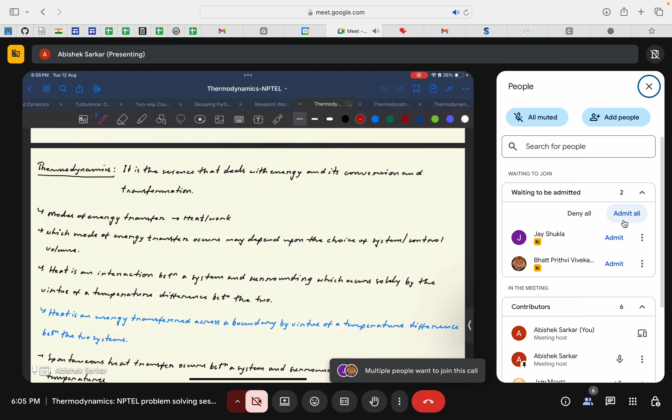So let me just reiterate. Similar to our previous week's sessions, we will try to briefly look into the concepts that were discussed by Professor Anand in the lectures. I will briefly go through them for your revision, and if any discussion is required, we will try to do that. But if there's any pertinent doubt even after discussion, I would encourage all of you to put that in the discussion forum of this course. We will look into it and respond afterwards.

And once again, I will say that all the required information or clarifications are well contained within the lectures and the suggested textbooks, so you can refer to that as well afterwards. But this session we will just try to focus more upon solving some problems, similar types of problems that are relevant to your assignments as well as your examination.

Okay, so after discussing the topics that were taken by Professor Anand in the lectures, we will directly... Sir, excuse me. Yes, please.

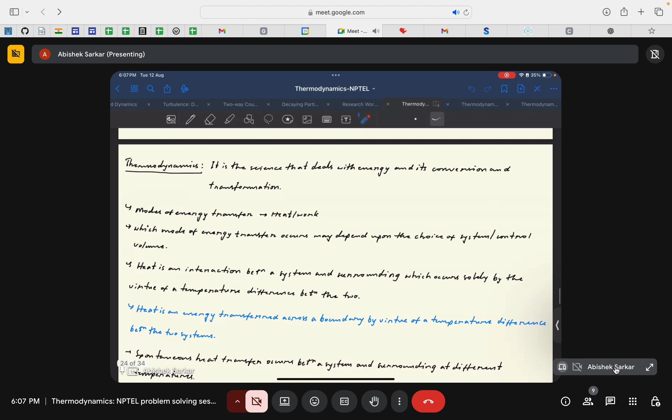Okay then. So yeah, as I was saying, I will briefly go through the topics by Professor Anand, and then we will try to solve some problems. That's the agenda for today's discussion. So with that, let's start today's discussion.

If you recall, in the beginning of this course, we mentioned that thermodynamics is a very vast subject which primarily deals with energy and its conversion and transformation. We discussed these modes of energy transfer, heat and work. By now you might have got an idea about heat and work interactions as well as internal energy. Having attended the past two lectures, you should have gotten some idea of what heat and work are. But as mentioned by Professor Anand, it is some kind of a chicken and egg thing.

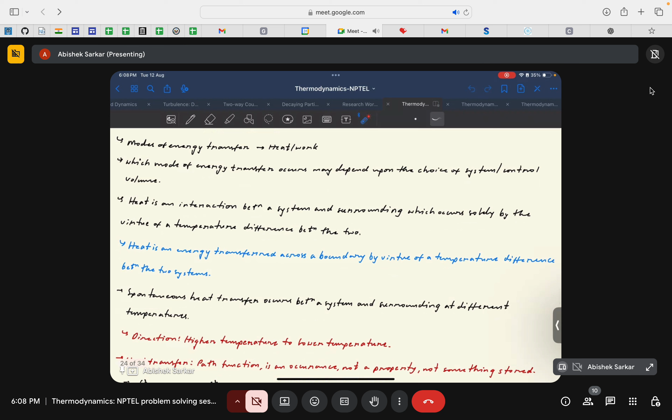So we mention heat in terms of work, then work in terms of heat, and specifically internal energy in terms of both of them. They are interconnected in a way, and this relation between heat, work, energy, and their conservation is given by the first law of thermodynamics, which is the primary topic of discussion for today's session. By now, briefly, I and Professor Anand in his lectures would have introduced you to the first law of thermodynamics, that is the law of energy conservation. This will be the primary point of discussion for today, as well as the problems depending on this topic.

And so, till now we have discussed about work interactions and internal energy, right? We have discussed internal energy in previous classes, and we have also mentioned this heat transfer, Q, but we have not dived deep into it. So before officially introducing the first law of thermodynamics, I think it is wise for us to briefly discuss heat.

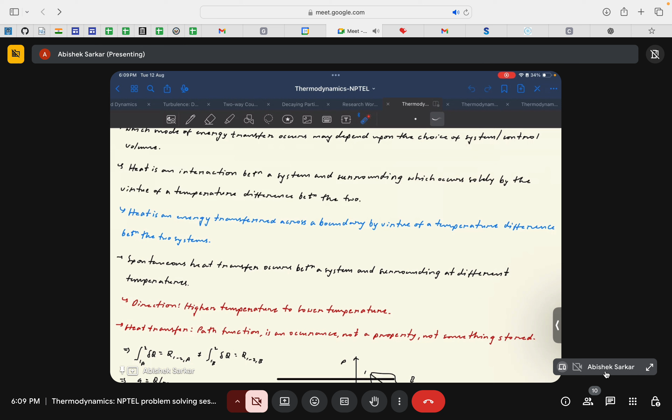Heat, I think by all means you are all quite aware of, but in terms of thermodynamics, it is similar to work. It is a boundary interaction between a system and the surrounding, which occurs solely by virtue of the temperature difference. So for heat transfer to occur, there has to be a temperature gradient between the system and the surrounding, and vice versa. That's the primary requirement for heat transfer to occur.

This spontaneous heat transfer, the heat transfer that takes place by itself, occurs between the system and the surrounding at different temperatures, and the direction of this heat transfer is always from higher temperature to lower temperature. This is observed only in spontaneous heat transfer, the heat transfer that occurs by itself.

For example, going back to the hot cup of tea example: given that your surrounding temperature is around room temperature, say 300 Kelvin or 25 degrees Celsius, and your tea is around 80 degrees Celsius, it would just make sense that the hot tea kept in a room temperature surrounding would cool down after some time, because of the heat transfer from the tea to the surrounding.

But it's not always the case. You might ask, isn't it possible that I heat the tea up even more? Yes, of course you can. It's 80 degrees Celsius initially, but if you put the tea on an induction stove, the temperature of the tea will go up. This is where heat transfer occurs by heating up the tea using an external energy source, even though the tea was interacting with a much colder surrounding.

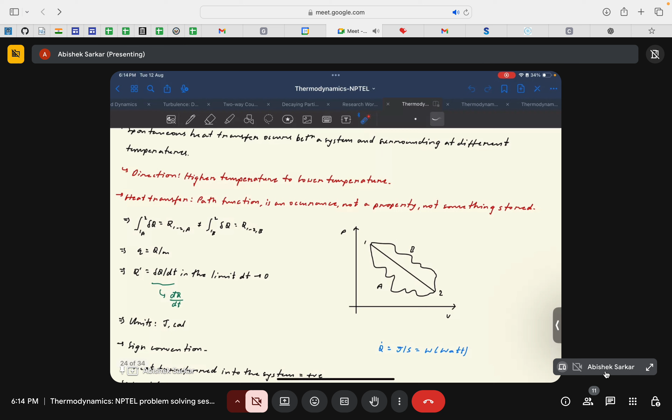Entropy is one of the most important topics in this course. Once we introduce the second law of thermodynamics, we will get more idea about the directionality of heat transfer. Right now, for the first law, we are just concerned with the balance of energy interactions, the balance between heat interaction, work interaction, and internal energy. I hope this is clear, let's proceed further.

Similar to work interaction, heat transfer or heat interaction is a path function, not a property of the system, and thus is dependent on the path followed by the system to attain or reject heat. The path followed by the system basically means the type of process incurred for the heat interaction to occur. In this diagram, the system follows two different paths, path A and path B.

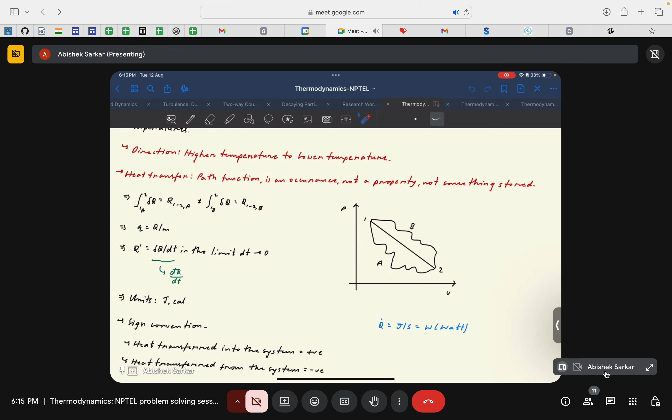Okay, for some energy interaction, for some heat transfer to occur. Since this heat transfer is a path function, heat transfer from 1 to 2 through path A will not be equal to heat transfer from 1 to 2 through path B. This will not be equal since it is a path function, but energy interaction would remain same because it is a state function.

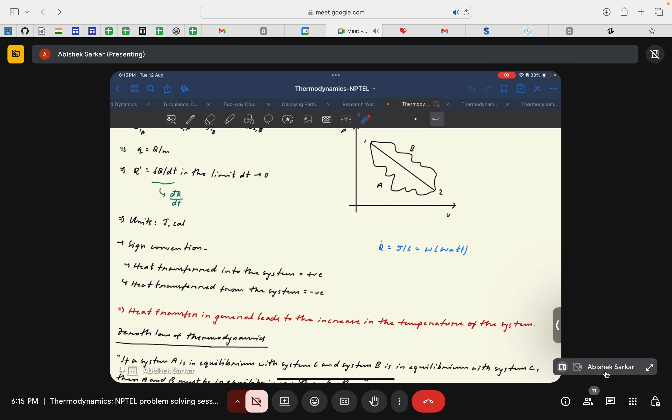We'll look into that one example. The unit of this heat interaction is same as energy and work done, that is joule or calorie. For our course we will primarily focus on joule, this is the SI unit, but calorie is also one of the units to quantify heat, work, and energy interactions.

The other important parameter is the sign convention. Previously we discussed the sign convention for work interaction. Similarly, we need to follow a standard sign convention for heat interaction as well. When heat is transferred into the system, it is taken as positive, and when heat is transferred out of the system, it is taken as negative. If you recall, in the case of work interaction, work done by the system was taken as positive, and work done on the system was taken as negative. It's a good practice to remember the sign conventions.

Of course, by practice or by regular solving of some thermodynamic problems, you will become quite familiar with it, but still it's a good practice to just remember it.

Now let's discuss the zeroth law of thermodynamics. The zeroth law of thermodynamics states that if a system A is in equilibrium with system C, and if a system B is in equilibrium with system C, then A and B must be in equilibrium with each other.

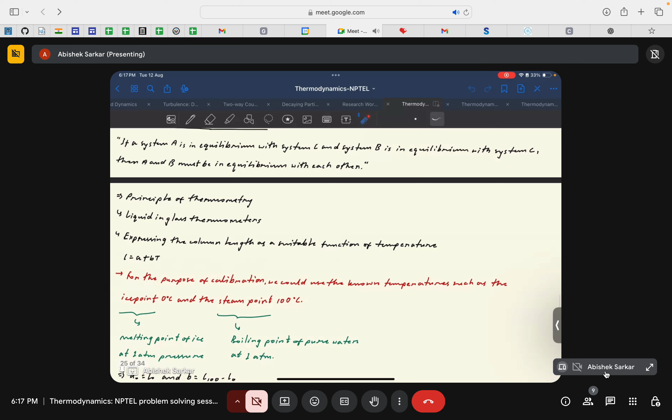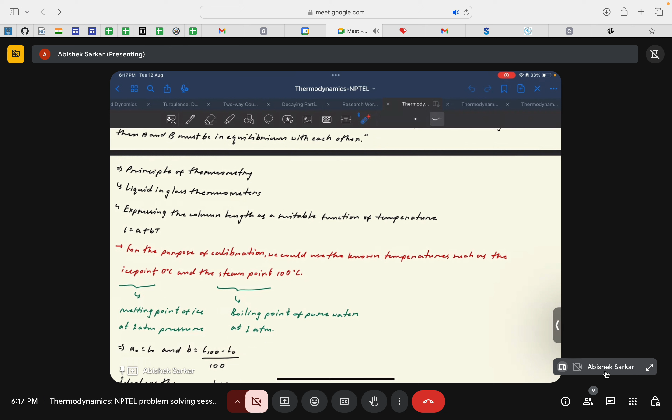This zeroth law of thermodynamics is the basis of the principle of thermometry, that is the basis of the design of thermometers that we use to measure temperatures. The details of that I won't go into - I think Professor Anand has taken ample time to discuss that, so I will just go through briefly. There are some problems, two problems I guess we have for today's discussion. I think it would be wise to look into them and emphasize on them more rather than the theory part, since it was already discussed in the class. So I will try to just go through quickly and emphasize more on the problems.

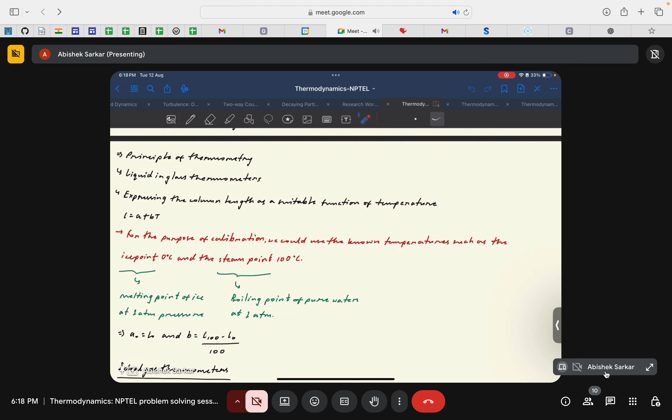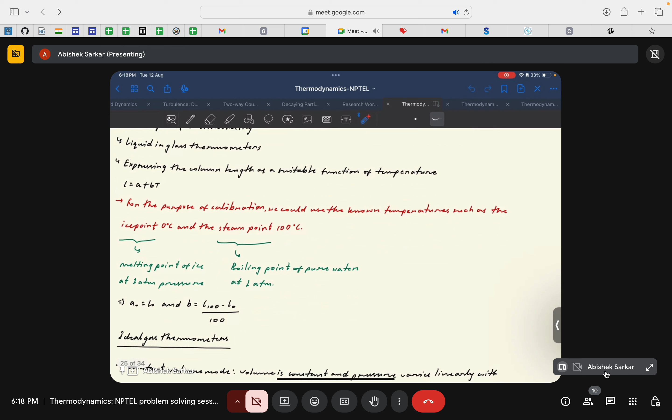There was a discussion on the liquid in glass thermometer. One example was taken, where the way of quantifying temperature was based on expressing the length, the column length, as a suitable function of temperature. We assume that the temperature and the length of the liquid in the thermometer have a linear relationship given by L equals A plus BT, where A and B have to be empirically evaluated.

And usually, as mentioned by Professor Anand, for the purpose of calibration, that is finding the value of A and B, these constants are usually found out using well-known temperature values. For example, if the liquid inside the thermometer is water, it is well known that water will freeze at a temperature of 0 degrees Celsius and boil at a temperature of 100 degrees Celsius. So if you substitute the value of these two things, then you can easily find the value of A and B, and then your thermometer will be well calibrated.

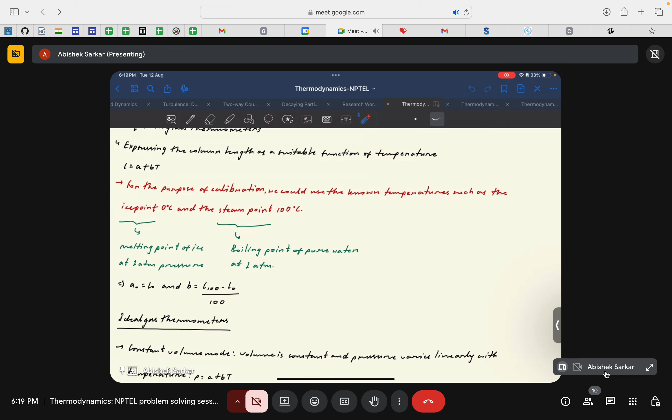Similarly, if you're using different types of liquids, if you know the boiling and melting points, then you will be able to calibrate, given that your temperature and the length of the liquid in the thermometer has a linear relationship. So that's also a suitable requirement for the types of liquid that are chosen for thermometers.

Then there were ideal gas thermometers. I think I will skip this part. Similarly, there are two modes: constant volume mode and constant pressure mode. In constant volume mode, volume remains constant and the pressure varies linearly with temperature. Inversely, in the case of constant pressure mode, pressure remains constant and volume varies linearly with temperature. So these are two things.

I will just go through it quickly. Then there are thermoelectric based devices, thermocouples, something like that, where there is a relationship obtained between the temperature and the potential difference. They assume that the electromotive force has a relationship given by A plus B T plus C T square, where A, B, C are constants, and you need to use empirical methods to find the value of these constants and then calibrate your thermometer to make it suitable for measuring temperatures. So the details of that, I think I won't go into.

There are some problems that we can look into, which will be more helpful for all of you, so I'll just try to stick to that. But if there's any doubt or specific inquiry that you want to do regarding these kinds of things, you can always put them in the discussion forum. We'll look into it and answer back. But for the sake of this session, let's try to focus on the problems.

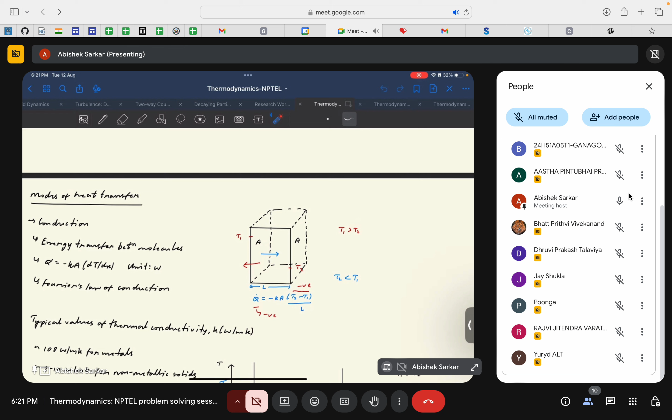As a yes or no? Yes. Yes, sir. Okay, thank you so much. Who was it? Okay, never mind, but thank you, sir. Okay, thank you so much.

So let's proceed further. Then comes the different modes of heat transfer.

Let me just say, out of curiosity or interest, that these modes of heat transfer, or heat transfer in general, is actually treated as a separate subject in the branch of mechanical engineering, because thermodynamics, or classical thermodynamics as I must say, is a fundamental or integral part of the mechanical engineering course of any undergraduate or postgraduate studies. In their course structure, thermodynamics and heat transfer are taken as two different subjects.

So heat transfer, or modes of heat transfer, are generally taken as a separate subject and are quite vast and extensive by themselves. Here we will just briefly introduce you to these three major modes of heat transfer, that are conduction, convection, and radiation. Of course, these are all mentioned in your lecture notes and were taken by Professor Anand.

But if you have not been introduced to heat transfer yet, or you are taking the heat transfer course right now, or have already taken it, just as an idea to you, I will say that this is a separate course in itself and it's quite vast and extensive, and there are ample problems that might be given from these modes of heat transfer itself.

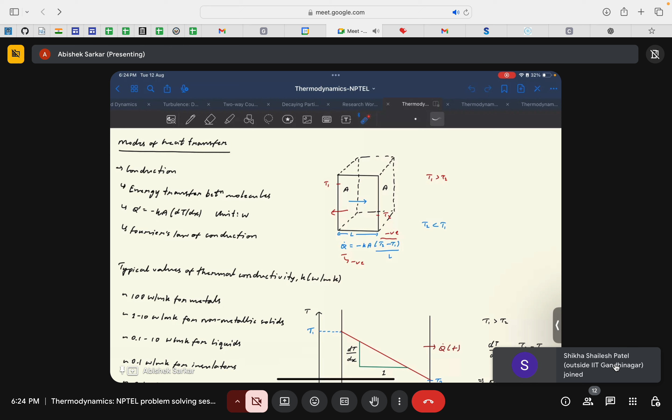But nevertheless, I will just stick to what was discussed in class. I think that would be more than enough for this course. So as mentioned by Professor Anand, there are three modes of heat transfer: conduction, convection, and radiation. We'll look into all three of them separately.

Starting with conduction, the thing that easily becomes relevant to us. In this case, the energy transfer occurs between the molecules, and the law that governs this conduction is given by Fourier's law of heat conduction, given by this relation: the rate of heat transfer is given by minus K A times dt by dx, where dt by dx is the temperature gradient between the two surfaces where the heat conduction is occurring, K is the thermal conductivity, and A is the area of contact between the two surfaces, or the surface through which the heat transfer is occurring.

Let's take this example: consider this is a wall, a cuboidal shaped wall. Then let's consider that we are looking at the rate of heat transfer across these two surfaces.

Okay, surface 1 and surface 2. Across these two surfaces, the area of conduction would be this entire area. Then you want to know the rate of heat transfer in this area, in this region. So this will be the area of concern.

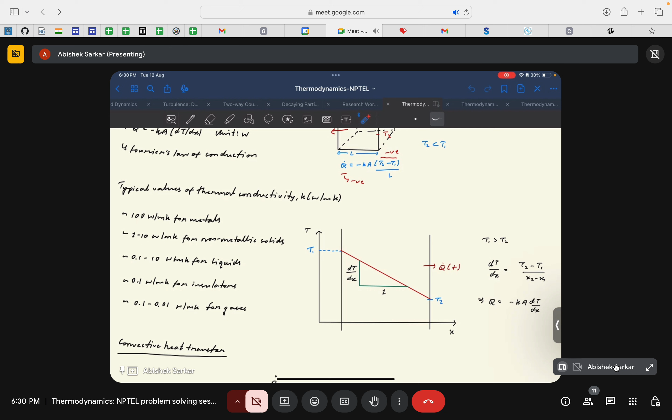I hope it was clear. And then we come into the concept of convective heat transfer. Thanks, Prithvi. So then comes the concept of convective heat transfer.

As a precursor, I will tell you that thermal conduction laws have a very analytical equation — as I mentioned, there's the Fourier law of heat conduction, a very nice analytical governing equation that governs heat conduction in objects.

But for convective heat transfer, there is a general trend that this kind of heat transfer is generally empirically quantified, because if you recall the discussion by Professor Anand in the lectures, for convective heat transfer there has to be a bulk motion of fluid, and it is only relevant in the case of fluids.

It is for gases or liquids. For convection, or convective heat transfer, to occur, there has to be a bulk motion of this fluid, either gas or liquid. This kind of heat transfer is usually quantified using empirical formulas.

Once you study heat transfer as a subject, in undergraduate or even postgraduate level, you will see that this convective mode of heat transfer is usually empirically quantified, with different coefficients mentioned to quantify this mode of heat transfer. It might seem a bit irrelevant right now, but I'm just giving you a brief introduction.

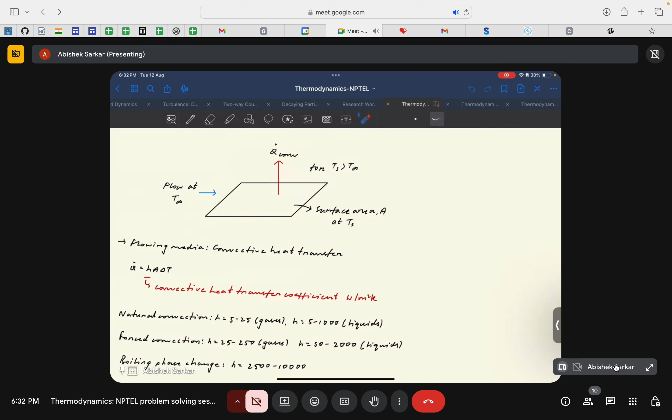Because there is a bulk flow of air across or above this plate, there will be heat transfer from this plate to this bulk motion of fluid. Because of this bulk motion, there will be a temperature gradient between the surface of the plate and the region where we want to obtain the temperature, and since there's a bulk flow of fluid, there will be a convective mode of heat transfer.

This convective mode of heat transfer is quantified by the relation: the rate of heat transfer Q dot is given by H times A times delta T, where H is the convective heat transfer coefficient, with units of watts per meter square Kelvin.

So as I was mentioning, the empirical nature of quantifying this mode of heat transfer usually comes handy when evaluating the value of this h. You will see that this value of h depends on different non-dimensional numbers such as the Nusselt number and the Prandtl number. These are something new to you, but I'm just mentioning them - they will become quite relevant to evaluate the value of h, which is then used to quantify the rate of convective heat transfer.

Just one more thing to add: if someone says there is a convective mode of heat transfer occurring, one thing to note is that if there is convection, it is sure that there has to be conduction as well. Let me give you an example.

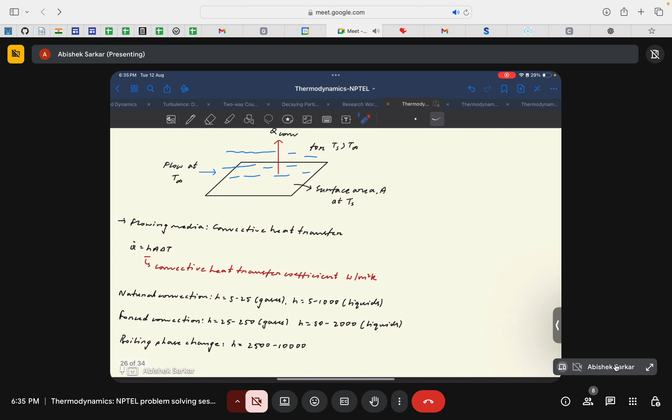Again, there are two different types of convection: natural convection and forced convection. I think this was discussed thoroughly before, but I'll just say that natural convection occurs because of a density gradient - the flow of fluid above the surface may occur because of density gradient. For example, it is kept stationary and continuously heated.

Because of heat, the layer of fluid near the surface of the plate will get heated up and become of lesser density. Since it is of lower density, this low density fluid will try to go up and the higher density fluid will try to come down. When the higher density fluid comes down, it will again get heated up and become of lower density than the upper layer, and again try to go up.

This type of motion will continue to occur, which is popularly known as convection loops. As you can see, there is no external agency being used to generate the bulk flow of the fluid. This motion of fluid is only occurring because of the density gradient. These kinds of flows are known as natural convection.

The value of H generally for gases in the case of natural convection is from 5 to 25 watt per meter square Kelvin. Similarly, in the case of liquids it is higher, around 5 to 1000 watt per meter square Kelvin. But in the case of forced convection, rather than the density gradient generating the bulk flow, for example, I am using an external fan.

I am using a fan to flow the liquid or force the liquid to flow through the plate. In that case, I am using an external agency to force the flow of liquid over the plate. So this is known as forced convection.

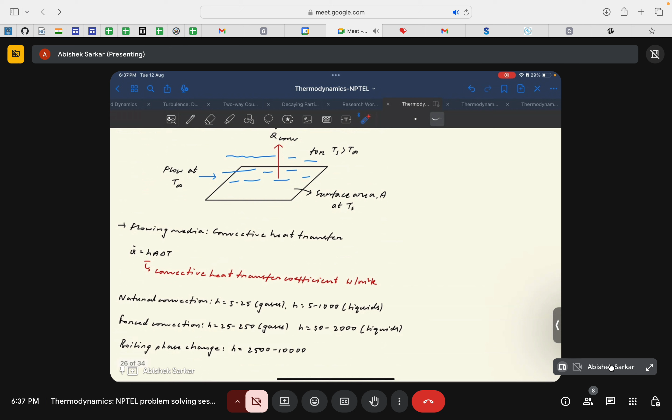In this case, even if your geometry is the same and the temperature difference is the same, the rate of heat transfer will increase because of the higher value of H in forced convection. So for the same geometry and temperature difference, the value of H or the convective heat transfer coefficient is higher for forced convection compared to natural convection.

For gases it now varies from 25 to 250, and for liquids it varies from 50 to 2000. So if you are solving a problem based on forced convection and getting a value of H for liquids around say 5 to 25, then you should think it might not be correct, because for liquids in forced convection cases, the value of H usually varies from 50 to 2000, usually around at least 1000 or greater.

It's just a good way: if you know the range of these values, you will know that your answer might be faulty, if you know the common values of H for different types of flows. Then for boiling phase change, the value of H is usually around 2500 to 10,000. I will look into it once it becomes more relevant.

Now for radiation, this is again transmission of energy through electromagnetic waves in space. The formula that governs the rate of heat transfer through radiation is given by the Stefan-Boltzmann law: q dot equals epsilon times sigma times A times Ts to the power 4, where Ts is the surface temperature of your object which is emitting heat. Sigma is the Stefan-Boltzmann constant given by 5.67 into 10 to the minus 8 watt per meter square Kelvin to the power 4, and epsilon is the emissivity of the surface compared to a black body. This value of emissivity is given for different kinds of surfaces.

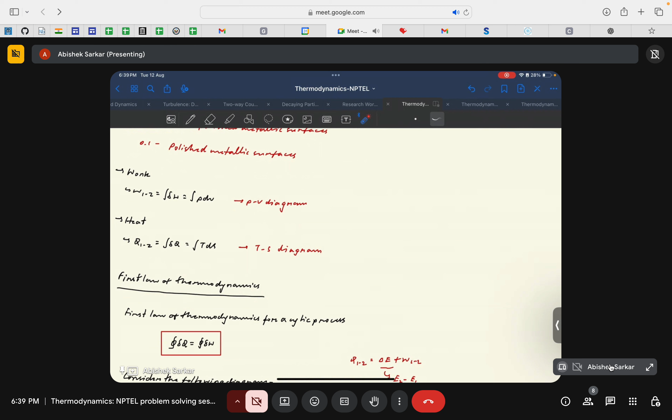So again, a brief introduction: in the case of work transfer, we used a PV plot to get a quantitative idea of how work transfer is observed or quantified, and we saw that the area under the P-dV curve gives us the value of work transfer.

Similar to that, in the case of heat transfer, there is a different plot: the temperature-entropy plot, and the area under this T-dS plot or temperature entropy plot gives us the net value of heat transfer. This will become quite relevant when we discuss different thermodynamic cycles, but it's still a good way to introduce it to you.

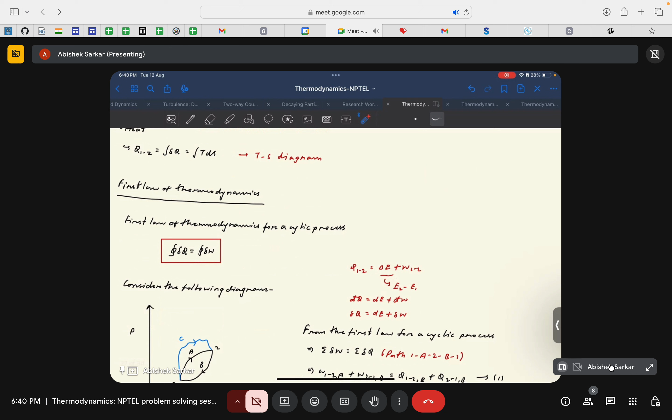Now let's formally introduce the first law of thermodynamics. I briefly mentioned in the last class through a numerical problem that if there was a thermodynamic cycle occurring, we found that the summation of the total heat interactions in the system and the summation of total work interaction of the system are equal in the case of a cyclic process.

Okay, so in general, the first law of thermodynamics is given by this law. For example, if a system is going from state 1 to state 2, then the total heat transfer is equal to the change in internal energy plus the total work transfer. The sign of this work transfer depends on whether the work is done on the system or by the system. Similarly, the sign convention for heat interaction depends on whether heat is transferred into the system or rejected by the system.

So this is the general form of the first law of thermodynamics. But things become interesting when the thermodynamic process occurs in the form of a cycle. In the case of a thermodynamic cycle, the total heat interaction would be equal to the total work interaction, given by this relation.

So now there is an elegant way to show that our internal energy, or the energy of the system, is indeed a point function. Let us look into it.

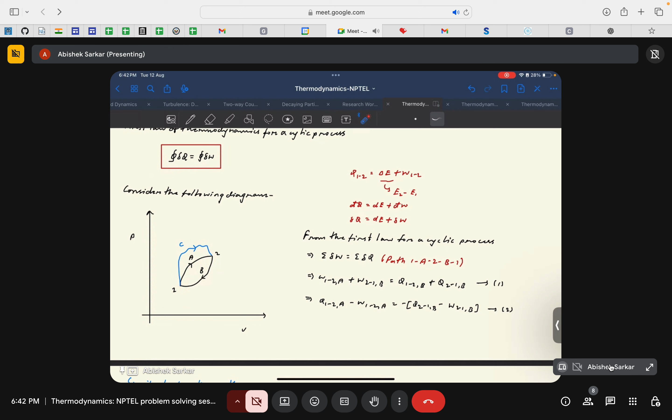Consider a thermodynamic cycle occurring from point 1 to point 2. It might happen that we follow path A to go from point 1 to point 2, then come back to point 1 following part B. Or we can go from point 1 to point 2 through part C and then come back to point 1 through part B. So you can see that the way we go to point 2 varies depending on the part followed, either A or C, but the way we come back to point 1 is through B only.

For example, these different parts would imply different types of processes followed to obtain the change of state. It may happen that part A is an isothermal heat transfer, path C might be a polytropic process with an index value of say 1.3, but part B is an isobaric process where the heat transfer occurs at constant pressure. So there might be different ways through which the change in state has been obtained.

Now from the first law of thermodynamics, since this is occurring in a cycle, we get that the summation of net work interaction is equal to the summation of net heat interaction. Say I'm considering the first path, that is 1-A-2-B-1. Then work done from 1 to 2 through A, plus work done from 2 to 1 through B, would be equal to the net heat transfer from 1 to 2 through A and the net heat transfer from 2 to 1 through B.

Net work done from 1 to 2 through A plus net heat interaction from 1 to 2 through A, then net heat interaction from 2 to 1 through B. If you rearrange this, taking this term here and this term here, you will get that Q(1 to 2, A) minus W(1 to 2, A) is equal to minus of Q(2 to 1, B) minus W(2 to 1, B). So that is equation 2.

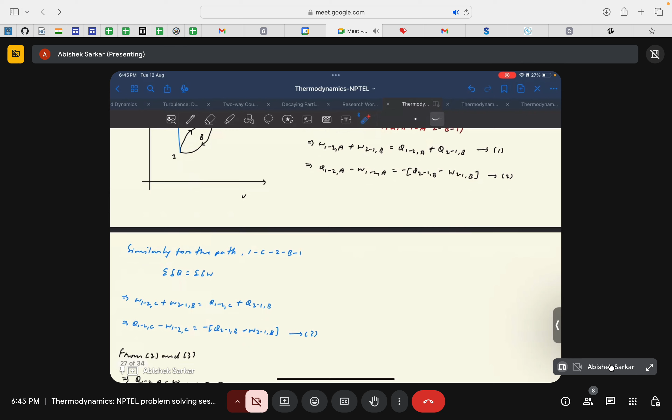So it implies that Q1 to 2A minus W1 to 2A is equal to Q1 to 2C minus W1 to 2C. So even if your net heat transfer or net work transfer is dependent on path, this entity, heat minus work, is independent of path. You can see that Q1 to 2A minus W1 to 2A is equal to Q1 to 2 minus W1 to 2C. This difference between heat and work is a path independent property.

So if it is a path independent entity, then this becomes a property of the system because it is path independent. And this difference, from the first law of thermodynamics, is the energy of the system. So this proof shows us that the energy of the system is independent of path and is thus a property of the system, or a point function.

This is a point function, or a state function. I hope this discussion was clear.

So again, there is a following brief discussion on different kinds of energy of the system. Professor Anand showed that the energy of the system might be comprised of, or the total... just one second, just one second.

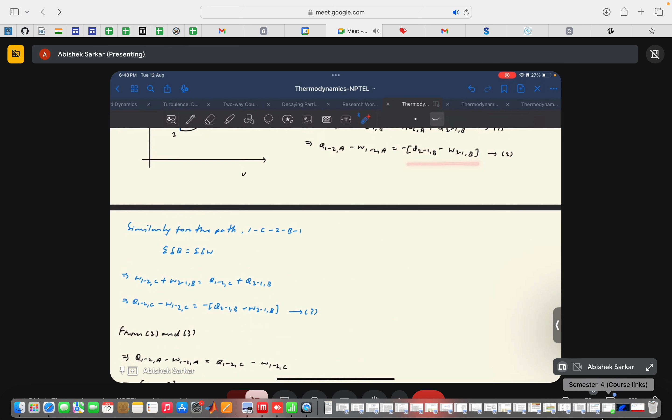From 2 and 3, let me just write it again. From 2 and 3, you can see that the right hand side of the equation is exactly the same. That's one thing to note. So if that's the case, it will imply that the left hand side are equal to each other.

So Q1 to 2A minus W1 to 2A should be equal to Q1 to 2C minus W1 to 2C. Is it fine? From equation 2 and 3, if the right hand side is exactly the same, then the left hand side should be equal. So I can say that Q1 to 2 minus W1 to 2 through path A should be equal to Q1 to 2 minus W1 to 2 through path C. So I'm saying that even if...

Q1 to 2A is not equal to Q1 to 2C, and W1 to 2A is not equal to W1 to 2C, because these are path functions, but their difference, the difference between Q1 to 2A and W1 to 2A, is equal to Q1 to 2C minus W1 to 2C. Even if these are dependent on path, their difference through different paths is the same. So that's what I wanted to show, as demonstrated by Professor Anand in the steps. This difference is same for any path, or independent of path.

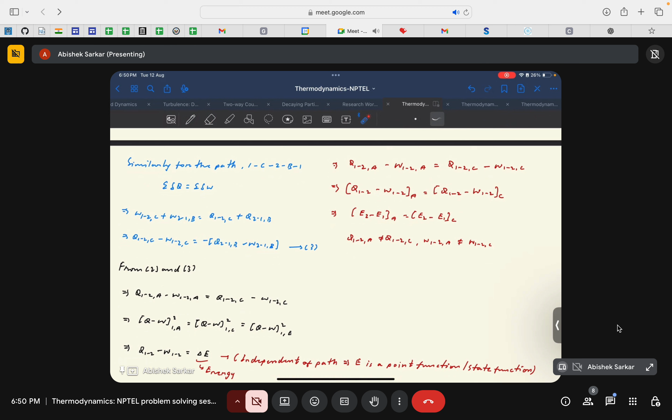So from the first law it will basically imply E2 minus E1 for path A is equal to E2 minus E1 for path C, from this relation. So it implies that this change in energy is independent of the path, even if individually Q and W are path functions, but the difference is a point function or a state function. So is it clear?

Okay, thanks Jay. Astha, is it clear? Yeah, thank you Astha.

Okay, so as I was saying, following that, Professor Anand has discussed different types of energy of the system that comprise the total energy of the system, that is E. E here is actually the total energy of the system, which can be majorly comprised of the kinetic energy, potential energy, and the internal energy. Sir showed different ways through which you can quantify your kinetic energy and potential energy.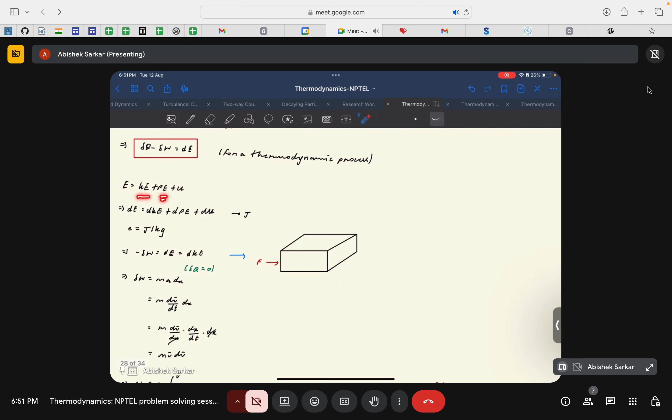So kinetic energy can be quantified as mv square by 2. You can go through the steps in the lectures, I will not go through it right now. Potential energy is quantified by mgh, and your internal energy is, again, for ideal gases usually quantified by cv delta t or cp delta t, depending upon how the process is achieved. But we will look into it once we get to some relevant examples.

So for example, in this case, if there is a piston cylinder type of system where you are supplying, and this is your control volume, with variable size, a deformable control volume, one way to say it. Now if you are saying that you are applying a heat of 100 joules into the system, which is resulting in this gas to expand, and because of the expansion of the gas within the cylinder, it is able to push the system outwards to obtain a certain amount of displacement, which is resulting in a net work done against the atmospheric pressure to be equal to 50 joules.

The total internal energy stored within the system would be 50 joules from the first law of thermodynamics. The net heat interaction is positive because heat is applied into the system, so it is 100 joules, and work is done by the system. Q1 to 2 equals delta E plus W1 to 2. Heat is applied into the system, so it is positive. Work is done by the system, since it's expanding against atmospheric pressure, so it is positive 50. So delta E becomes 100 minus 50, equal to 50 joules.

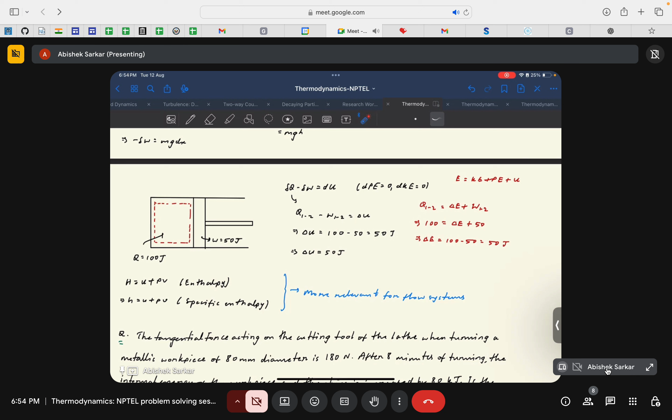But how is it delta U? We know that E is Ke plus Pe plus U. In this particular example, there is no major significant change in the kinetic energy or the potential energy, so the type of energy that has the major contribution to the total energy of the system is the internal energy. With that approximation or justification, we can write that delta E should be equal to delta U.

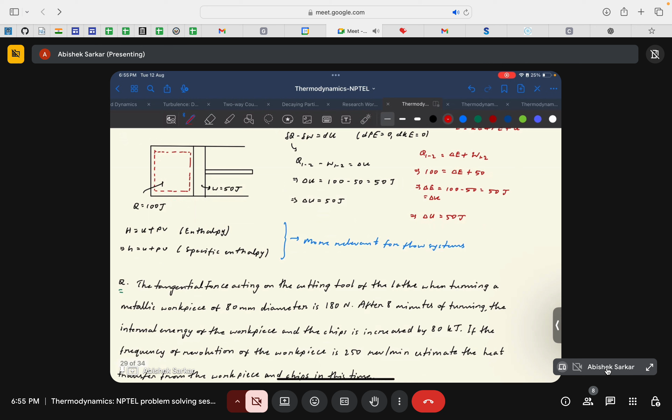Delta U should be equal to 50 joules. Depending on the type of system, the contribution to the total energy would vary, but from a thermodynamics perspective, the types of problems we will deal with would majorly emphasize more on the internal energy of the system, that is delta U. That's what I wanted to mention.

Then there is the introduction of enthalpy, which is thermodynamically defined as the sum of internal energy U plus the product of pressure and volume. Or if you divide it by mass, it becomes the specific enthalpy: h equals small u plus pressure times specific volume. So it's just a thermodynamically defined entity, or property of the system, and this property becomes more relevant in the case of flow systems. We will see some examples with flow through the system, where you'll be able to appreciate the introduction of enthalpy.

So let us look into some problems. These problems I will just go through briefly, since they were already taken by Professor Anand in the lectures. There are, I think, 2 problems, and I have time to go through both. Then we can directly start the problem solving part.

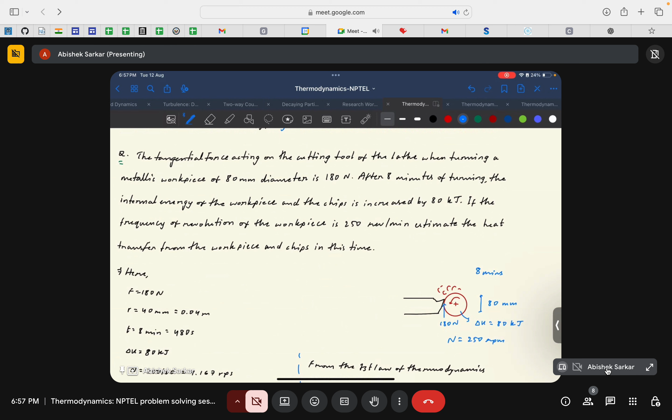Let's go through this example very quickly. This was already covered in the lectures, but I'll go through it quickly so you can brush up your solving skills, and then we can go to the real thing.

The tangential force acting on a cutting tool of a lathe when turning a metallic workpiece of 80 mm diameter is 180 Newton. So the cutting tool is exerting a force of 180 Newton on the workpiece. After 8 minutes of turning, the internal energy of the workpiece and the chips has increased by 80 kilojoules.

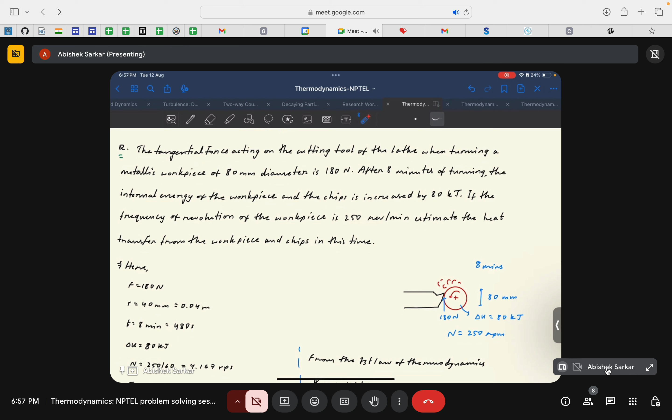If the frequency of revolution of the workpiece is 250 revolutions per minute, estimate the heat transfer from the workpiece and chips in this time. If you look into it, all the specifications are already given: the net change in internal energy has increased by 80 kilojoules, and the work is done on the system.

Work is done on the workpiece through the tool, and since it is having a rotational motion, this kind of work done can be quantified through your net moment applied on the tool. So the net moment would be force times the perpendicular distance.

So T would be F times R, that is F, the tangential force was 180 Newton as mentioned in the question, and the radius is 80 divided by 2, or 40 millimeter. So the net moment or torque in this case is 7.2 Newton meter.

Now the revolution per minute is 250, so the revolution per second you have to find to quantify the net work done. So N will be 250 divided by 60, or 4.167 rounds per second. We know that the net work interaction is given by torque times the angular displacement.

The angular displacement is given by 2 pi N t, where N is in rounds per second, and t is the total time. So this will become 2 times pi times 4.167 times 7.2, that is the net torque, and t is 480 seconds, 8 minutes. If you do that, you will get work done as 90.4 kilojoules.

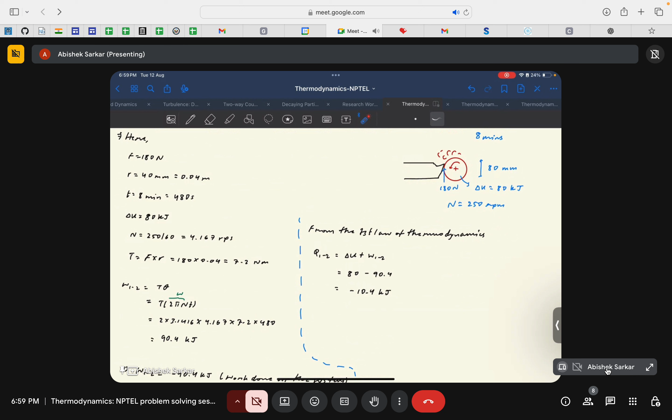And it is minus because work is done on the system, where your system is your workpiece. Work is done on the piece through your cutting tool. So now by first law of thermodynamics, we have that Q1 to 2 is delta U plus W1 to 2.

Then delta U is 80, has increased. They mentioned that internal energy has increased by 80 kilojoules. So work is done on the system by this cutting tool, so it is minus 90.4.

So the net heat transfer is minus 10.4 kilojoules. So heat is being dissipated out of the system. That's what we get from this thermodynamic law. Again, it's a very simplified portrayal of the real problem, but it's just a way to introduce you how to apply the first law of thermodynamics.

Okay, thanks Jitendra. Now let's directly dive into the problem solving part. I hope my screen is visible.

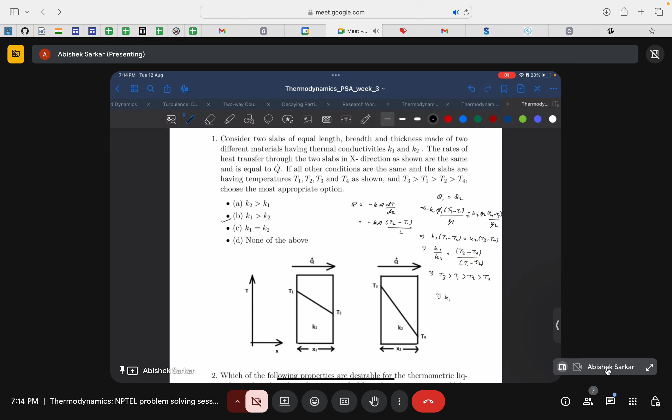Okay, just simple rearrangement. So now, because T3 has the highest value, which is greater than T1, which is greater than T2, and which is greater than T4 - since T3 has the highest value and T4 is the least value, and T1 and T2 are intermediate, it simply implies that this difference of T3 and T4 has to be greater than the difference between T1 and T2 from this relation. It's easily understood. So this would imply that K1, the numerator, is greater than the denominator, so K1 should be greater than K2. Okay, so it was quite simple.

Let's see whether, okay, this question is again interesting, it's more theoretical, in a more theoretical sense. So the question is which of the following properties are desirable for thermometric liquids in a liquid-in-glass thermometer?

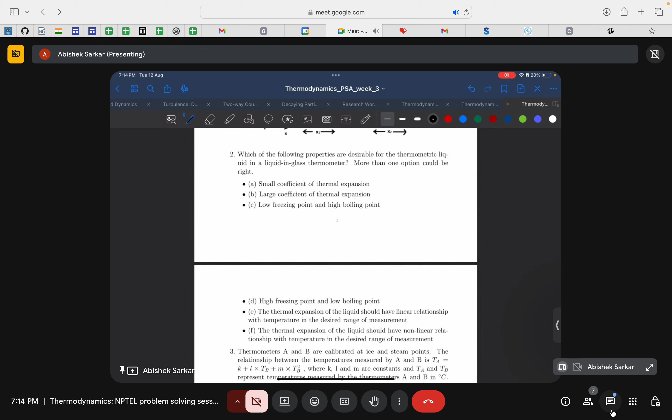And more than one option could be correct. Okay, so I can give 2 minutes. You can put in your answers in the chat. Let us just look into it, there can be more than one option that might be correct. Give your answers, let's look into them, discuss them, and then I think we'll proceed. Okay, 2 minutes, 7:15 to 7:17, you can just discuss your answers, tell your answers, and we'll discuss them.

Okay, Aastha says B, C, and E, where B is large coefficient of thermal expansion. Jay also says B, C, and E. C is low freezing point, high boiling point, and E is thermal expansion - the liquid should have a linear relationship with temperature in the desired range of measurement.

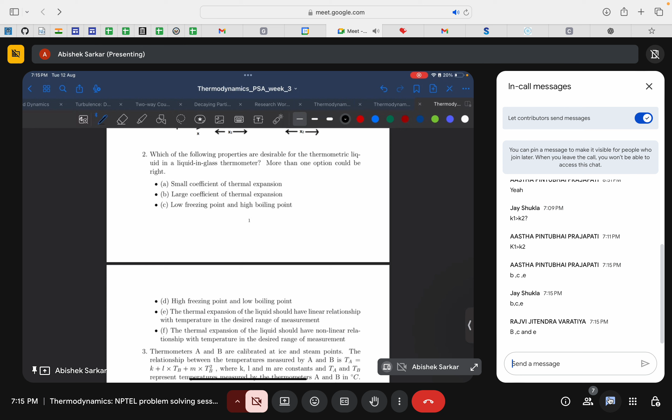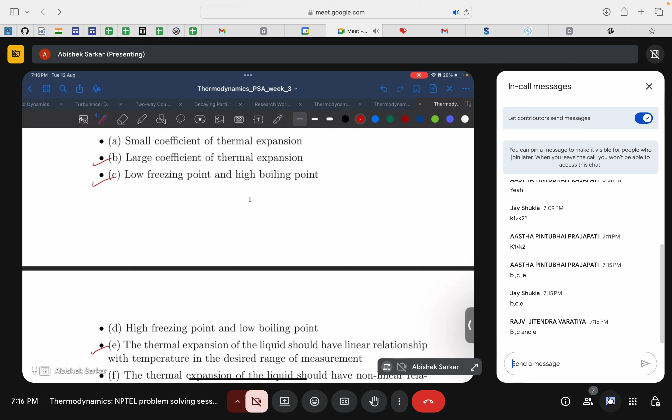Okay, so as it seems that all of you are telling the right answer, since 3 of you have mentioned it, it is correct. The required properties are that you should have a large coefficient of thermal expansion, low freezing point and high boiling point, and the thermal expansion of the liquid should have a linear relationship between the temperature and the desired range of measurement. Okay, it's quite understandable from the statement itself, but let us just go through them once so that it becomes a bit more clear.

Okay, so first is the large coefficient of thermal expansion. The thing is, for example, if you're using a thermometer where the fluid expansion is quite low between two different temperature values, then it will become quite difficult to read between the scales.

For example, if the liquid in the thermometer rises up to a value of only 1 millimeter for a temperature change of 10 degrees Celsius, then it becomes quite difficult to measure temperature values which have variations of 5 degrees Celsius. It will vary to 0.05 to 0.5 millimeter, which is almost imperceivable by a human eye.

So that's why it's desired that it should have a large value of thermal expansion coefficient, so that even for small temperature changes, the liquid inside the thermometer should vary a certain value, so that the reading between temperature values becomes easier. Second is low freezing point and high boiling point.

You can see that the requirement is that the fluid inside the thermometer should be in the liquid state. It becomes quite desirable that, since if it has a very low freezing point and a very high boiling point, the range of temperature in which the thermometer would work becomes larger.

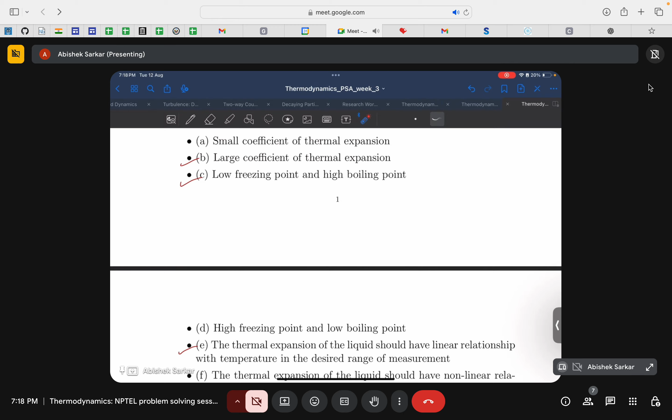That's why it's beneficial if the value of the freezing point is low and the value of the boiling point is high for this kind of liquids which are used inside the thermometer.

Finally, the thermal expansion of liquid should have a linear relationship with temperature in the desired range of measurement. This is something we have already discussed while talking about thermometers and the zeroth law of thermodynamics, that it is ideal if there is a linear relationship between the temperature variation and the rise of the liquid column inside the thermometers.

If the relationship becomes quadratic or cubic, this becomes quite difficult to calibrate. Finding the value of your constants in the relations becomes quite difficult, and it becomes difficult to observe as well.

For example, if in the lower temperature spectrum the liquid varies linearly, say for 10 degrees Celsius it shows 1 millimeter deflection, and for 20 degrees Celsius it shows 2 millimeter deflection, it's a linear relationship.

But in the higher end of the spectrum, say around 80 or 100 degrees Celsius, the relationship becomes different. For example, for a 10 degree difference it shows 1 millimeter deflection, but for a 20 degree difference it shows 40 millimeter deflection. So the relation becomes non-linear, and that's not desirable.

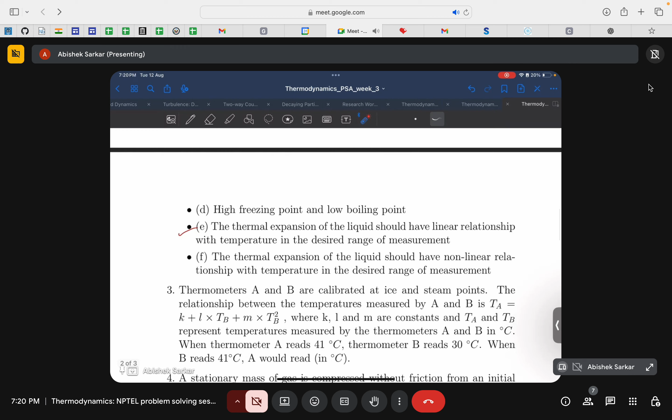That's why it's desirable that if the relation is linear throughout the range of operation, first, the calibration becomes easier, and second, the measurement of temperature becomes convenient. So that's the two things.

Now let's go to question number 3. I hope it was understandable. Let us go to question number 3.

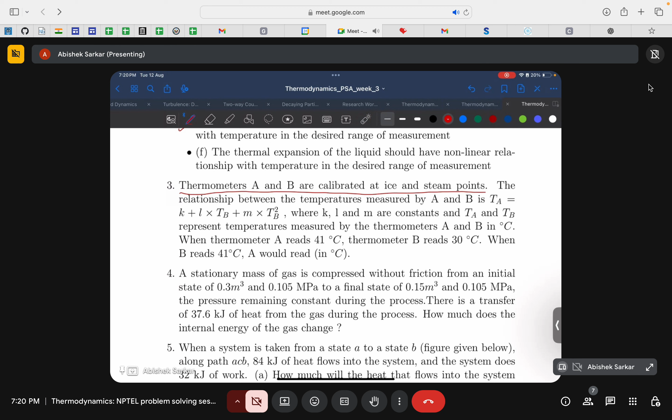Thermometers A and B are calibrated at the ice and steam points. Again these are very crucial statements, that they are calibrated. The relationship between the temperature measured by A and B is given by - oh sorry, I think we already did this example, so we can skip that part.

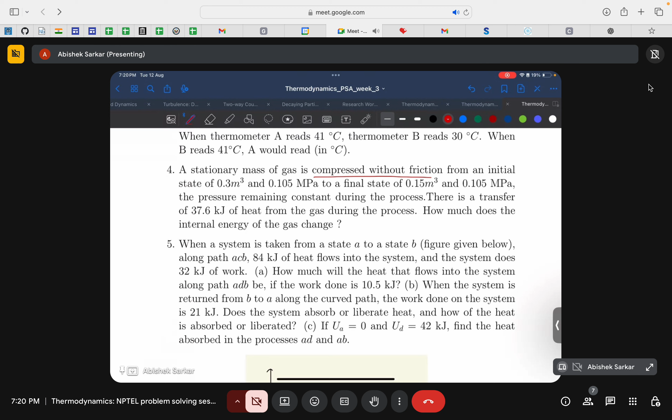Let us look into this question. A stationary mass of gas is compressed without friction from an initial state of 0.3 meter cube and 0.105 megapascal to a final state of 0.15 meter cube and 0.105 megapascal. So pressure, you can see, is remaining constant during the process - that's one thing to observe. There is a heat transfer of 37.6 kilojoule from the gas during the process. How much does the internal energy of the gas change?

I think again it's a very simple implementation of the first law of thermodynamics. You need to find the work done from these relations, these values. The net heat interaction is already given. Find the net change in the internal energy, or delta U, I must say.

So I will give you 4 minutes again to try to solve this question, and then we can proceed further.

Very simple, not that difficult. Simply just find the work done, the constant pressure work done - it's an isobaric process. Substitute these values in the first law of thermodynamics. Now then tell me the net change in internal energy.

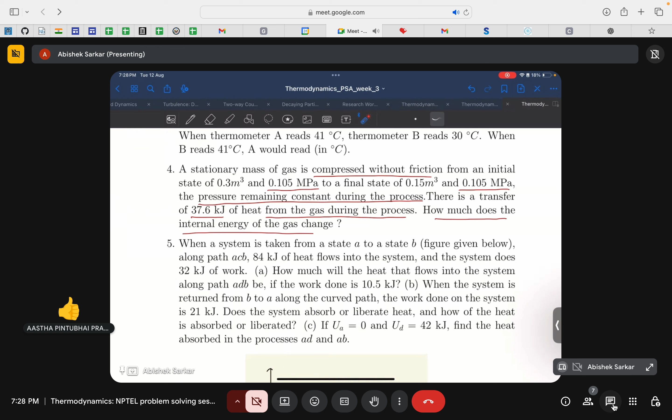So is it clear, Astha and Jay? Okay then, so let us look into the next question.

This question is a bit lengthy, so I'll keep it for the last. Let us look into this question first. I will give you this one as well for your exercise, to see whether you understood it properly or not.

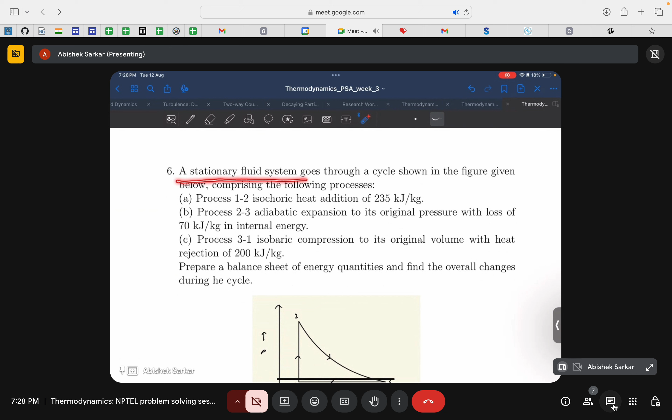A stationary fluid system goes through a cycle, as shown in the figure given below, comprising the following processes. Process 1 to 2 is an isochoric heat addition of 235 kilojoule per kg. Also look into the units of heat, it's saying heat energy per unit mass, so 235 kilojoule per kg.

Process 2 to 3 is an adiabatic expansion to its original pressure, with a loss of 70 kilojoule per kg of internal energy. So the net change in internal energy from process 2 to 3 is minus 70 — internal energy reduces, so minus 70 kilojoule per kg.

For process 3 to 1, it is an isobaric compression back to its original volume, with heat rejection again of 200 kilojoule per kg. So with this information, prepare a balance sheet.

This one you can just leave for the last. But right now, what you should do is find for me the total heat interactions. The question would be: find the summation of Q and the summation of W for the cycle.

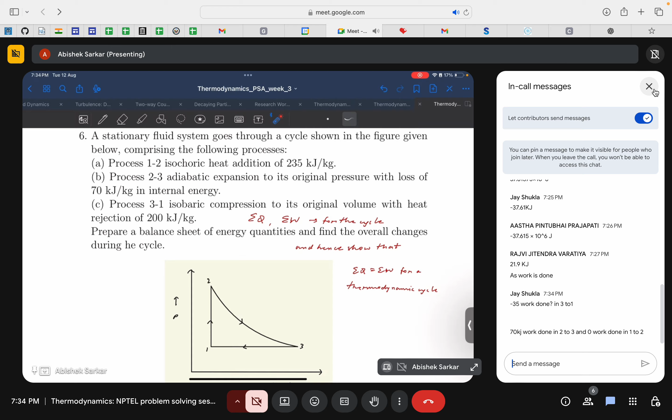Okay, so 3 to 1. Okay, let me just check. Okay, yeah, that's correct, Jay. That's correct. Yes, yes, it's correct.

Okay, so Jay has already given his answer. So others, Astha and Jitendra, can also contribute. Say 2 more minutes.

Yes, yes, Jitendra, that's correct. Yes, yes, Astha, that's also correct.

2 to 3, no, no, no, no, no. 2 to 3 would have a work done because there is an expansion going on. 1 to 2 does not have a work done, because it's an isochoric process. Constant volume process would not have any PdV work done. So from 1 to 2, work done is 0. 2 to 3, there is a work interaction.

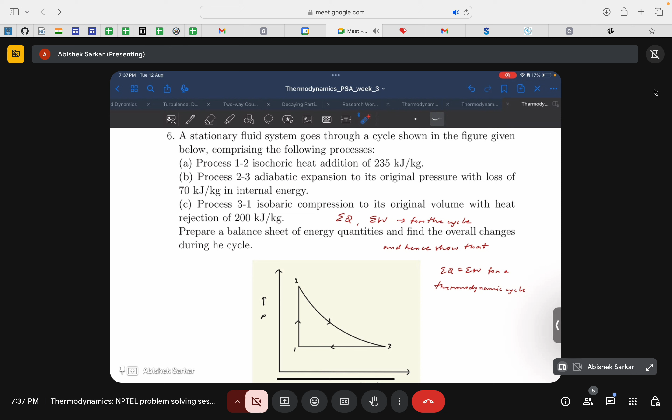Okay, time's up it seems. So thanks again to all of you for trying and answering. Let's look into the solution. It's quite simple, but again it's important to know. So this is the diagram.

Heat interaction from 1 to 2 is given as 235 kilojoule per kg. Work done from 1 to 2 is 0 because it's an isochoric process, constant volume process. So from the first law of thermodynamics, the net change in internal energy from process 1 to 2 is 235 kilojoule per kg, because work is 0 and Q from 1 to 2 is 235, so net change in internal energy is 235 kilojoule per kg.

Intuitively also you can understand that if heat is added to the system, the vibrations of the molecules of the system will increase, which will in turn increase the internal energy of the system, given that it's doing no work, so energy will be stored within the system.

Second is an adiabatic expansion. Since it's an adiabatic process, the net heat interaction is equal to 0, Q will be equal to 0. So from the first law we'll have that negative of work done from 2 to 3 is equal to U3 minus U2.

Since the change in internal energy is given in the question as decreased by 70 kilojoule, we will have that minus work done of 2 to 3 is equal to negative of 70 kilojoule. So cutting all negative sign from both sides, we get work done from 2 to 3 as 70 kilojoule per kg.

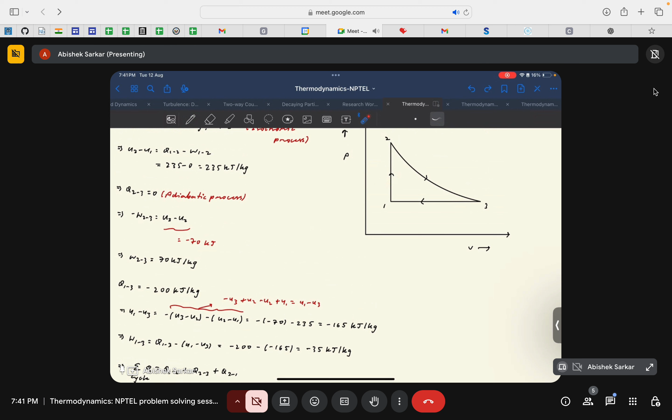Even so, let's check: the net heat interaction is heat added to the system in process 1 to 2, so it is plus 235. It's adiabatic, so heat interaction is 0 there. Again, heat is rejected from process 3 to 1. So if you add all of them up, you get 235 minus 200, which is equal to 35 kilojoule per kg.

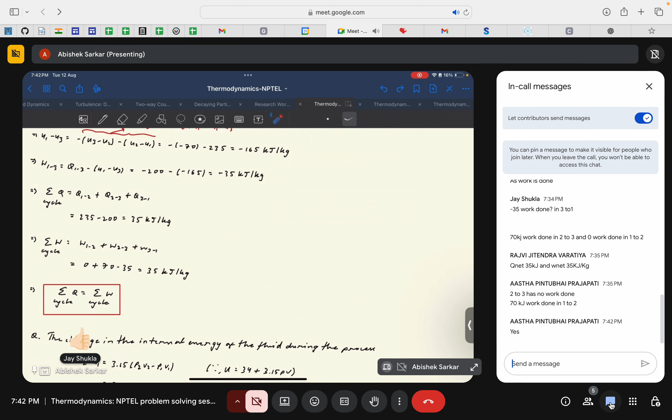I hope this is clear. Astha, is it clear? I don't know whether they are here or not. Okay, so Astha is still there. Thank you. Yes, thanks Jay.

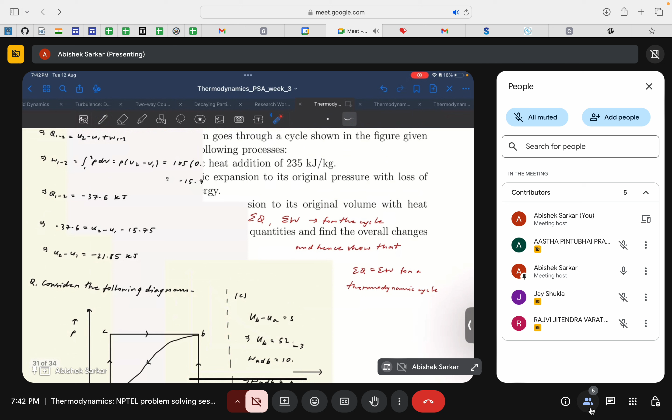Thanks Jitendra as well. So let us try to solve one more question. I think we have enough time. Let us go to this question. This will be a bit lengthy, not that much, but a bit lengthier compared to the problems solved till now. Let us look into it.

When a system is taken from state A to state B, as shown in the figure, along the path ACB, 84 kilojoule of heat flows into the system.

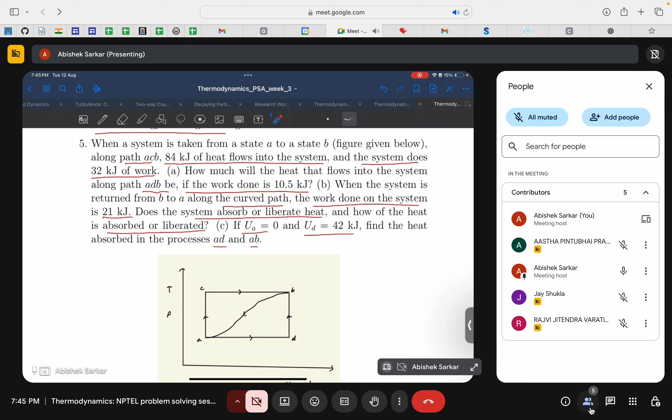Then I think for now let's try to solve this problem in parts. I will give you say 4 minutes for part A. Question is, how much heat flows into the system along path ADB if the work done is 10.5 kilojoule. Tell me the answer of part A by 7:49. I think that's doable, so let us do that and then we can discuss if required.

For question A, Jay is saying that the net heat interaction would be 62.5. Let me just check - okay Jay, that's correct. Others, Jitendra and Astha also, you can try, let us see whether you get the same answer. So Jay, if that's the case, you can proceed to part B. Astha and Jitendra also, if you get the answer - yes, thanks Jitendra. Then you can also now proceed to B. Jay says the answer for B is 73 kilojoule.

Okay, so question B was, Astha also, yes, thanks. Part A is correct. So now all of us can go to question part B, and Jay is saying it's 73 kilojoules. The question was, when the system is returned from B to A along a curved path, the work done on the system is 21 kilojoules.

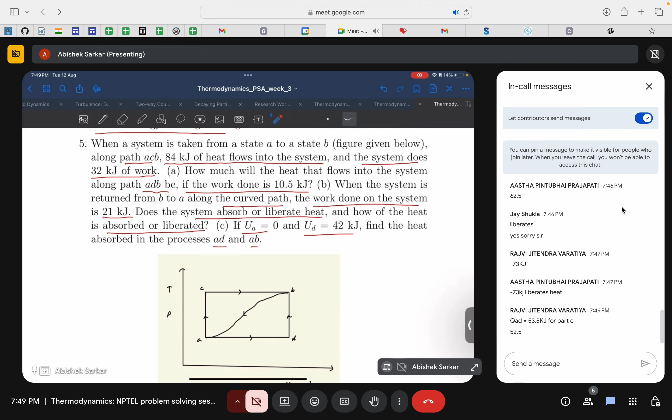Okay, so QAD is 53.5 as mentioned by Jitendra. Let me just check. QAD is 53. Let me just check. You can just say whether it's 53 or 52. Yes, 52, correct. Then you can tell me QDB as well.

QDB. 73. QDB 73, let me just check. Okay, QDB, I think you need to check again. Okay.

What will be the value of UB? AB is, yeah, exactly. You need to know what should be the value of UB, then UD, then WDB. What will be the value of that?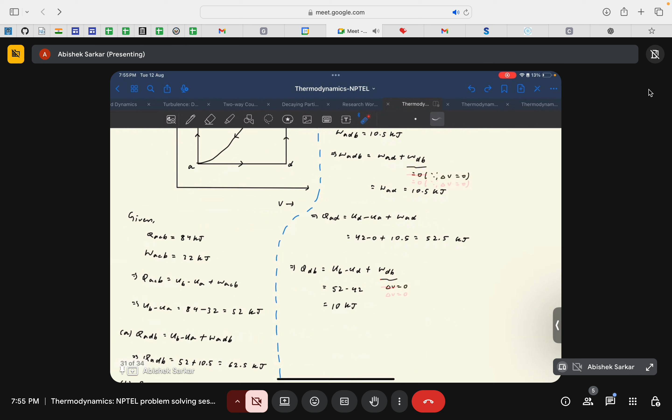Now for the final part, it's given that UA equals 0 and UD equals 42 kilojoule. We know UB minus UA is 52 kilojoules, so from that we get UB is 52 kilojoule because UA equals 0, and WADB is equal to 10.5 kilojoule as mentioned in the question.

Okay, WADB is 10.5 kilojoules. Now WADB is WAD plus WDB. WDB would be equal to 0 because net change in volume is equal to 0, so PdV work is equal to 0. So WADB would be equal to WAD, which is 10.5 kilojoules.

Now, QAD is equal to UD minus UA plus WAD. So UD minus UA would be 42 as mentioned in the question, because UD is 42 and UA is 0, and WAD would be 10.5 as obtained before. So we get QAD as 52.5 kilojoules.

Finally, for QDB, we have UB minus UD plus WDB. UB is 52, UD is 42 as given here, and WDB is equal to 0 because the net change in volume is 0. So QDB is UB minus UD, or 52 minus 42, equal to 10 kilojoules.

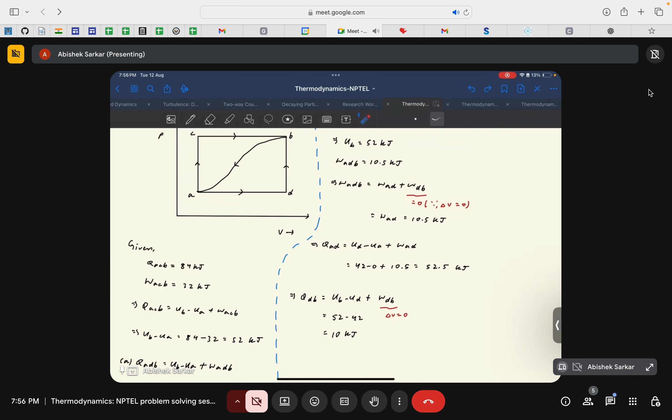Okay, so is it fine? Is it understood? Okay, thanks Astha. Jai Jitendra. Thanks Jitendra.

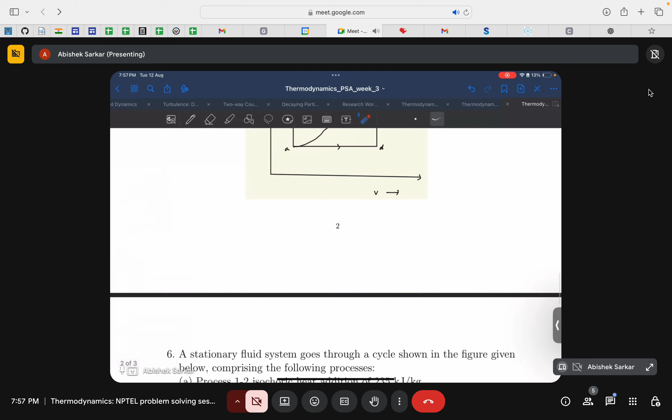Okay, so I think we have time for the last question. Let us just look into it. If you have any doubt, you can ask, or I think it's quite easily solvable.

An engineer has proposed a new temperature scale in which the ice point of water is taken to be 200 degree Q and the steam point is taken to be 500 degree Q. So this is a new temperature scale proposed by the engineer: ice point is 200 degree Q and steam point is 500 degree Q. What are the corresponding values in degrees Celsius for 100 degree Q and 300 degree Q? The relationship between the two temperature scales is assumed to be linear.

So I think it's quite simple again. You need to find a relationship between the Celsius scale and the degree Q scale and tell me the value for, say, today first we can just do this part: what will be the value in degree Celsius for 100 degree Q? Okay, so I'll give you a hint.

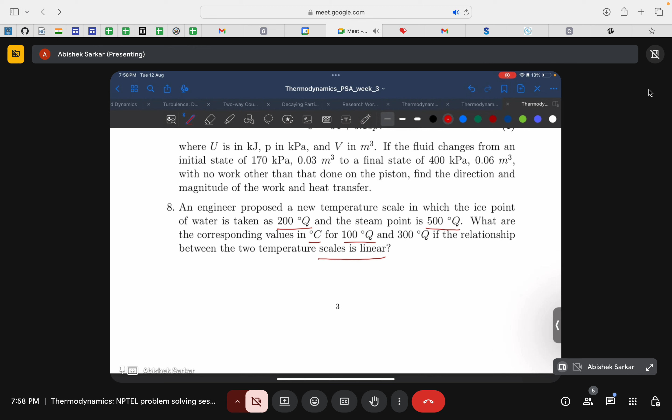Since we are out of time, let us just go through the solution from our end, then you can try it out. I will show you for T dash equal to 100 degree Q, then you can accordingly do for T equal to 300 degree Q. Okay, so let's look into it.

Given that T dash ice is the temperature scale for the new units of temperature, T dash ice is 200 degree Q and T dash steam is 500 degree Q as given in the question. But for our general case, T ice is 0 degree Celsius and T steam is 100 degree Celsius. It is given that the relationship between the two temperature scales is linear, so we can say T is equal to A plus BT dash, or T dash equal to A plus BT according to your requirement. If you change the relationship, the values of the constants will also change.

So we have the ice point for the new temperature scale is 200, and the ice point for our degree Celsius scale is 0 degree Celsius. So 0 is equal to A plus B times 200, and similarly for our degree Celsius scale, the boiling point is 100 degree Celsius, which is equal to A plus B times 500, where 500 degree Q is your new temperature scale.

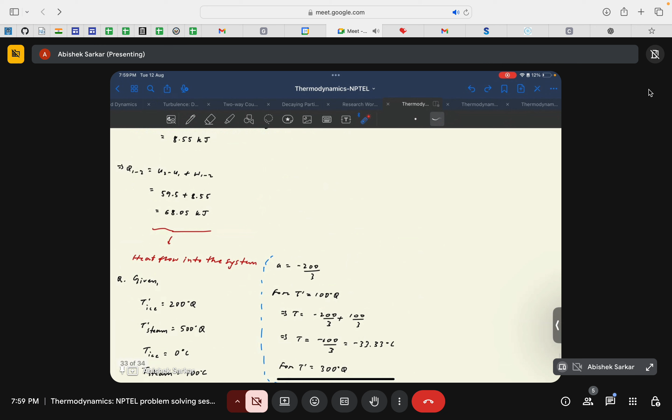If you solve these two equations, you get B is equal to 1 by 3, and A is equal to minus 200 by 3. The question was to find the degree Celsius value for T dash equal to 100 degree Q. So substitute the value of 100 degree Q in this relation along with A and B: A is minus 200 by 3 plus B which is 1 by 3 times 100, giving T equal to minus 100 by 3, or minus 33.33 degrees Celsius.

So I hope it's done. Similarly, you can find the value for 300 degree Q as well. I think I can leave that to you as an exercise. I hope this was clear.